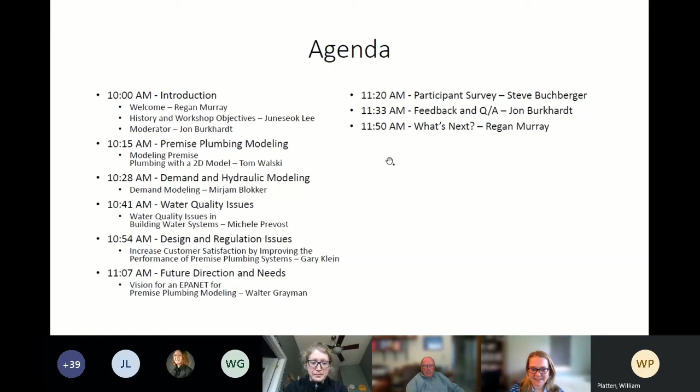Thank you, Regan. So let me first go over the EWRI, Environmental and Water Resources Institute. I believe most of you are very comfortable already and know the EWRI. Very briefly, it's ASCE's technical arm for environmental and water-related issues, and currently there are about 25,000 members within EWRI.

And PPM, Premise Plumbing Modeling, which was established last year in November, is a task committee of the WDSA, or Water Distribution System Analysis Committee, and it has a lead in EWRI in advancing the area of premise plumbing modeling. So the purpose of today's webinar, which was originally supposed to happen as a face-to-face workshop, is to advance the science of this new field of PPM, premise plumbing modeling, and help develop a building water systems management tool for use by practicing engineers, as well as the larger WDSA or water distribution systems research community, to support the safe design and operation of water distribution systems.

So having said that, I will turn over to Jon, our moderator today.

So, a couple of topics we're talking about: the fact that we are working with 2D models in general in a 3D world. We can track both water quality and hydraulics in the building. The solvers don't care if you're in a building or underground or exposed piping. The big problems are going to be bringing in good elevation data automatically. With system modeling, you usually have a digital elevation model that you can use to build your models quickly. You don't really have that sort of thing in a building, although you do in other ways.

One of the other things we'll talk about is the fact that water use in buildings now gets down to pulses. It's no longer these nice smooth demand patterns. And then we'll talk about how to look at the results.

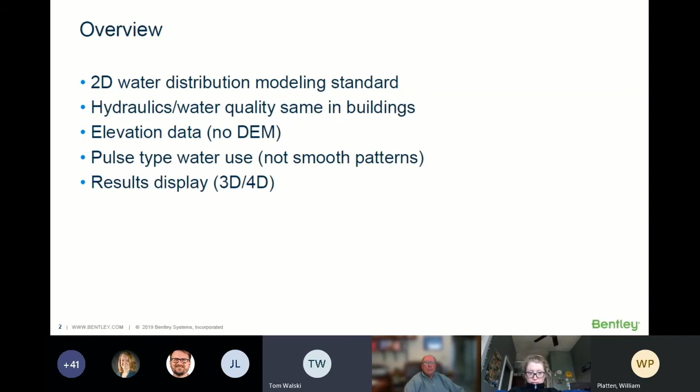Here's my trivial model of a system. This is what we have to do when you're trying to model a building with the standard kind of 2D models: break the floors up into individual models.

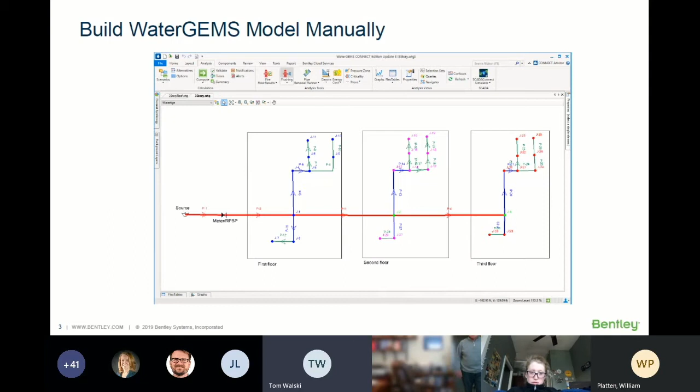So here is the building that I built. It's a 3-story building. We're going to treat the main in the street as a constant head source. This isn't always true, but usually most buildings don't have a significant impact on the distribution pressure, so treating this as a constant isn't too bad, or giving it some kind of pattern. Then we just laid out each floor with its own little plumbing, and we'll go over what those floors look like.

Here's what they look like. Each floor is going to have its bathroom with the sink, the ladies' room and the toilet, and the men's room. Over on the other side of the building is going to be a kitchen sink. So this is our trivial building. Each of the floors is going to be symmetrical, just to make my life easier.

You can run the model with those patterns. I used a random number generator to make my demand patterns up. I had nobody in the building at night, and then all these different uses of water during the day. You can color code by these elements and see which faucets are being run, which toilets are being flushed. Now I'm doing it by velocity of water in the pipes, and this looks really impressive. You just let this run as a time simulation, and you can see all these building water uses flashing on and off during the course of the day. It's a good way to illustrate what's going on and to track the water quality. So it actually looks pretty good - you can see, okay, there's a guy that just flushed a toilet and, gee, he didn't wash his hands, that sort of thing.

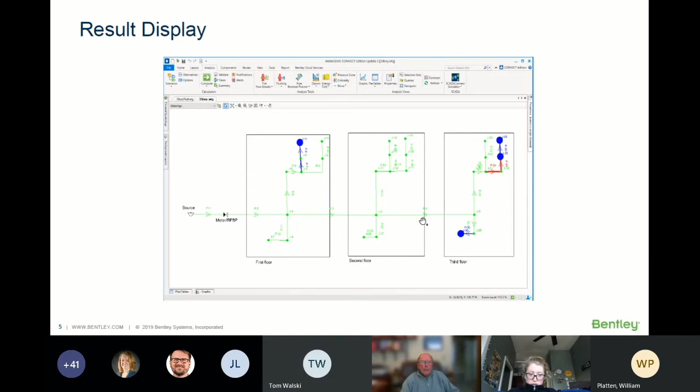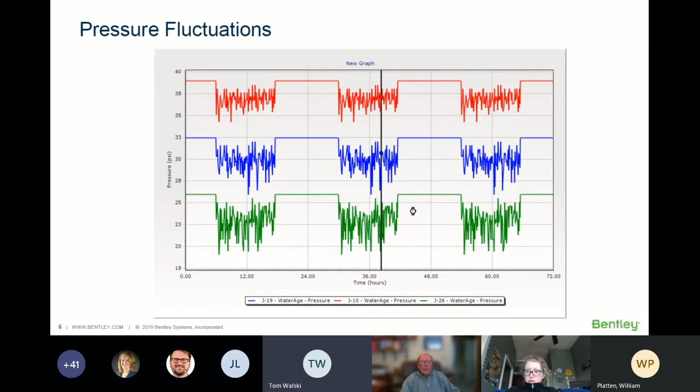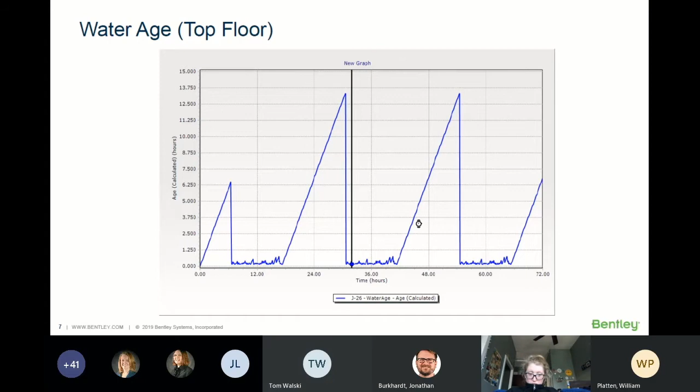Okay, and then we can actually look at the color code by velocity and see which pipes at any time have velocities there. So we do velocities and demands, and this is useful for seeing where the water goes. So this is the age in this particular case. You can see, at a certain hour today, some of these lines haven't been operated yet, so they're getting old water, while the ones that have been operated, it doesn't take very long for them to get flushed out with clean water.

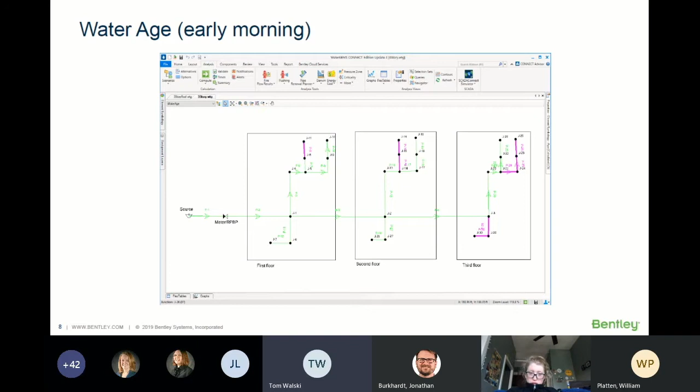Okay, then the next part of this is rooftop tanks. The place where things really change now are in buildings that have rooftop tanks. We're doing some work over in China where a lot of the tall buildings have rooftop tanks, and they really change the dynamics, and they change the water age pattern pretty significantly. They keep the pressure a lot more stable, but they affect the water quality because the water age in these tanks can be pretty high. This is some work that we're doing over there that is showing that this is going to be a bigger problem than the ones that don't have tanks. So tanks, just like in water distribution systems, if you're having problems with old water, you look at the tanks because that's usually where most of the aging occurs.

Okay, so now things have really gotten slow here. Now we're looking at pressure with the tank, and the pressures look a lot different too. The pressures stay maintained a little longer, so when you turn on a faucet at the upper floor, the pressure doesn't drop quite as much because the tank is right near that upper floor. Bottom floor, the changes are pretty minor in that particular case.

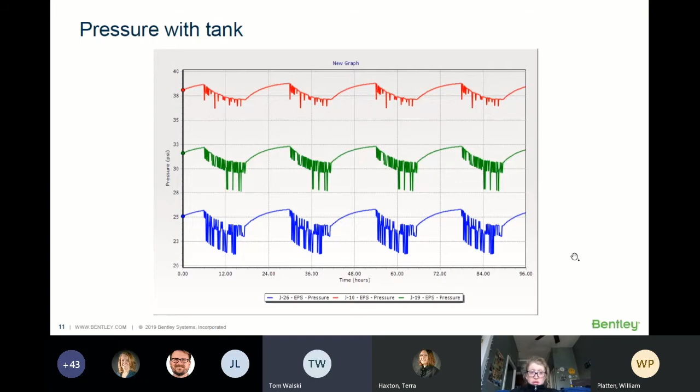Okay, then I looked at how to lay things out vertically, just to show that it can be done, two different ways where you put the riser pipe, but it doesn't look as pretty. I wasn't as impressed. I like laying the different floors next to one another, but if you want to lay them on top of one another to help display what's going on, this is what they look like. You can see this is laid out by diameter in this particular instance.

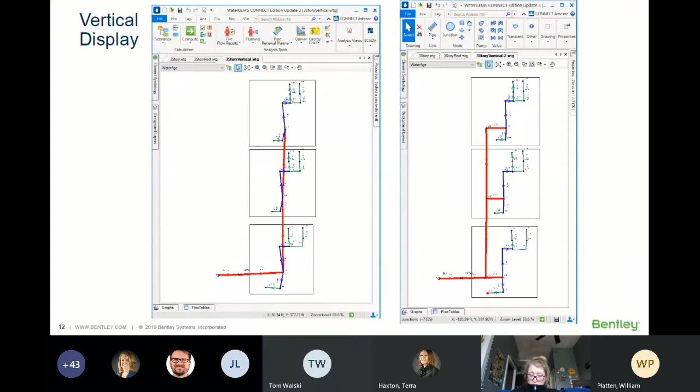So what happens is one of the big needs here is how do you build these models. Before you could do it with a GIS, but we don't have GIS in the building, so you need to go to BIM type software. This is where we have amazing software where we can take the building, do the X-ray of the building, and have the material showing where all the pipes are. You have a BIM model, building information modeling, and we could use it. That particular picture is actually an HVAC system, not the water system, but you get the idea that the data is there. Just as we import data from GIS to build water distribution system models, you can import data from building products pretty easily.

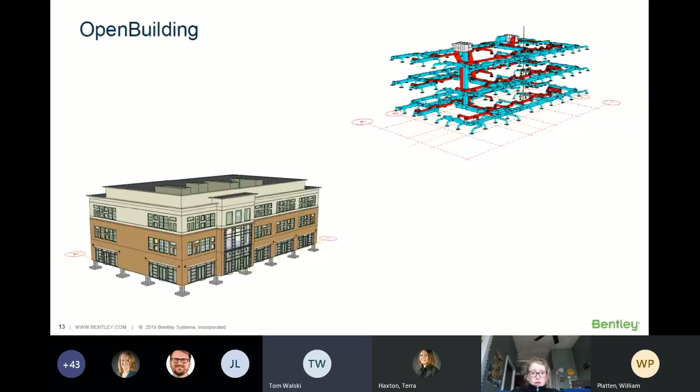This just shows some more. We have other tools used for plant design, for oil refineries and nuclear power plants and all. These kinds of models are great because you can extract the data quickly rather than manually building these models by digitizing them in 3D. I mean, it's really hard.

Looking towards the future, this is kind of stuff we already have. We can actually do hydraulics in 3 dimensions and show flows, but unfortunately it's only based on some really simple steady state hydraulics. So what we would need to do is link this kind of 3D technology for model building and results visualization with WaterGEMS or an EPANET-based solver in order to come up with really great visualizations.

I think the 2D stuff that I was showing works okay, but if you can show things in 3D, it really looks good. It's something we're kind of uniquely positioned for because we have all these tools that work in 3 dimensions. We've done a lot of this, we actually call it 4D, where it's 3-dimensional viewing based on ContextCapture over time. We've done things with our flooding products where we could watch floods, move anywhere we want in the city, and stand there and watch the flood come in and out. So it's definitely doable, and it's a matter of when the demand from people who want to buy software and have money comes in, we'll have this stuff implemented pretty quickly.

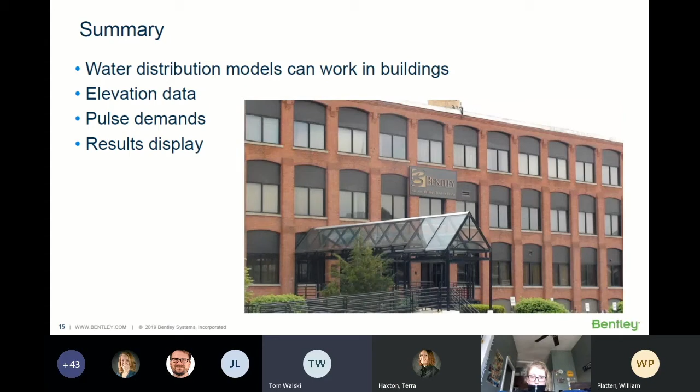Thank you. The issues that Tom brought up were related to demand estimation, and that segues into the next section on demand and hydraulic modeling.

Demand estimation and hydraulic modeling issues are important for premise plumbing systems. Water quantity delivery issues in a home or building can arise from poor distribution system pressure, as Tom noted, and also from poor premise plumbing design or changes over time that didn't take into account the whole history of the building. Water quantity has been a major concern in building design, with a focus on ensuring each demand receives the minimum flow when requested. While many uses of water are more volume-based - where you just wait for a glass of water to fill, and it may take a little longer - you may also have a more time-based use, where a shower with lower pressure may not really be desired, but within reason it's tolerated.

So you just take a shower for some length of time, and modeling the actual demands related to that is a challenging topic. Accurate modeling of usage patterns is critical, and models must ensure flow rates are accurately modeled if the pressure conditions are not sufficient for the requested demand. Models may also need to predict and keep track of who or what is using the water. Mirjam Blokker from KWR Water will now present some areas on this topic.

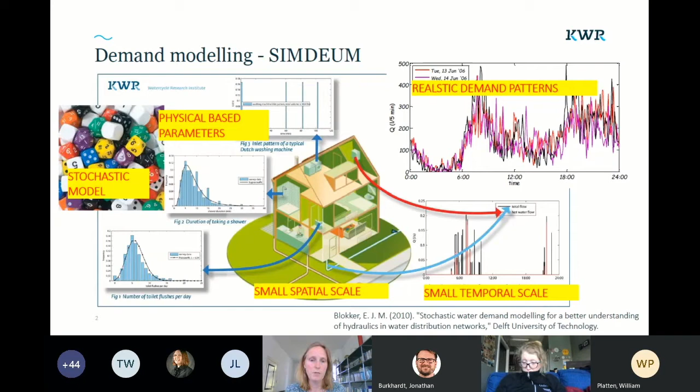And since we've really done this by end use, we not only know what the total water demand is, but also, for example, the difference between cold water and hot water demand. So this was built in from the start. Next slide, please.

This slide is for you to read later. To the next one.

I'm trying to give you a couple of examples of projects where we've used this model in premise plumbing modeling. Here is a very basic EPANET model of a home installation where you can see the water meter, then up to the water heater, and from the water heater to all the hot water taps, and from the water meter directly to the cold water taps. We've taken all the different end use patterns and applied them to the specific tap. Then you can look at hydraulics, as Tom showed, and water age, and other water quality. We've looked at temperature specifically, but also at some microbial parameters.

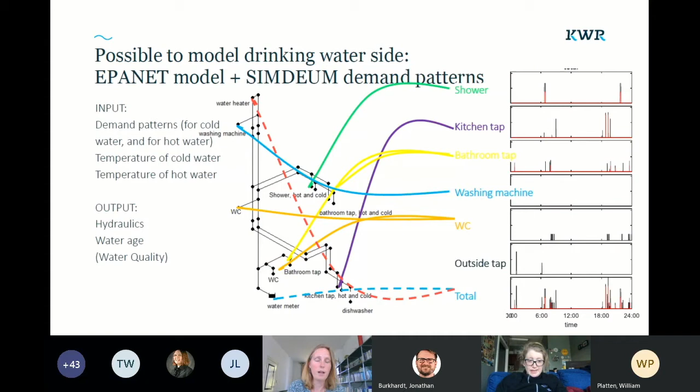Next, please. I would also like to apply these to premise plumbing of the in-home sewer, and I think the DRAINET model from Heriot-Watt University would be very useful. I am in contact, but haven't gotten the model yet from David Campbell, though he's willing to cooperate. So hopefully by next time I can show you some results.

It's very similar, of course, to the demand side, but this time on the discharge side, we can also add temperature and different nutrient loads depending on the end use. So nutrient load from shower water is different than toilet water, for example. Hopefully we can show you some results next time. Next, please.

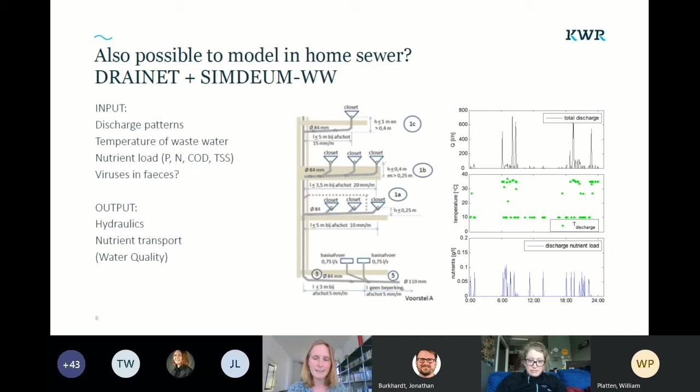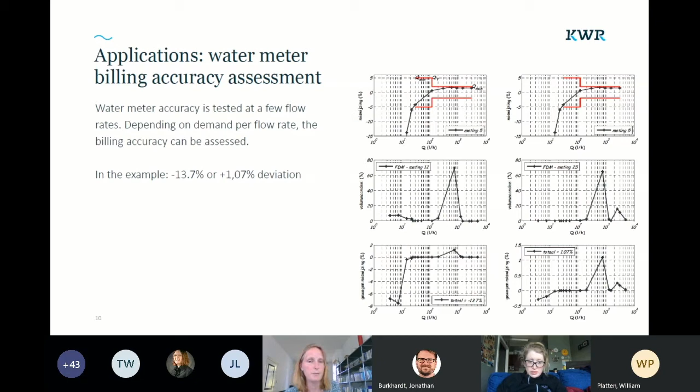By also looking at how these flows are divided over different flow rates, you can also assess billing accuracy, as typically at lower flow rates the water meter is less accurate. But if there's not a lot of use in that area, the effect on billing accuracy is not that large. It could be different depending on the demand patterns specific to the building you're looking at. Next, please.

One thing we did at TU Delft, Ljiljana Zlatanovic built a really nice model in an elevator shaft, mimicking a domestic drinking water installation. She measured for 1 year, and she did not invite people to live in this elevator shaft, but we put SimDeum demand patterns on each of the taps. There was a different demand pattern for each day of that year. We also introduced weekend days and weekdays.

She measured temperatures, and also some microbial parameters, trying to relate that to water age and things like that. The temperature model was found to be really close to what we actually measured, so that was a good validation. Next.

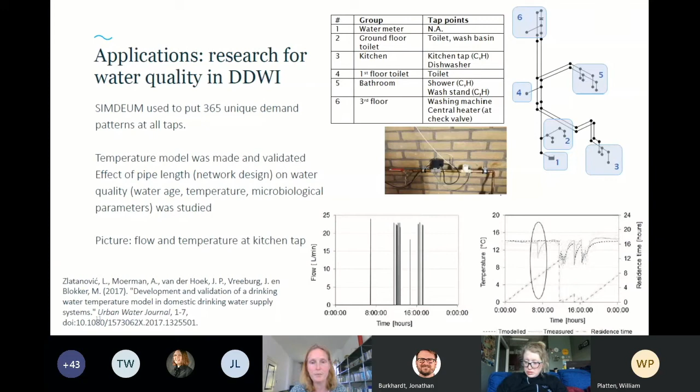Another application is to look at demands under stressed conditions. For example, what if there's not sufficient pressure, or electricity is not available, or people have to be in home isolation? We haven't looked at that yet. Especially pressure-dependent demand is really related to the 3D layout of your system, since your water heater is typically at the top floor, and if the pressure isn't enough to supply water there, people will not take showers unless they really like cold showers. There's no direct interaction now, but we have looked at what if pressure is sufficient to reach the first or second floor, but not the top floor.

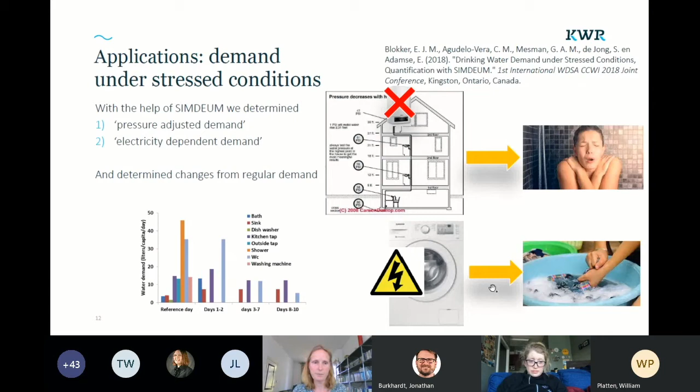Another application we looked at is the production of light gray water from showers, and the need for light gray water to flush toilets and use in your washing machine. Depending on the people living in the house and their behavior, you can determine what storage you need, not just for a single house but also at an apartment level. We found that a storage capacity of 200 liters per household could be sufficient to get a good reduction in drinking water demand, and rainwater did not add that much to it. It's really nice to look at what is produced and demanded at the same scale, instead of per-day estimations.

We've also looked at energy use for hot water. Taking into account the whole 3D layout of the system and pipe lengths, you can see how much energy is lost during waiting times and due to badly insulated pipes. This will also inform you about CO2 emissions or how much money is required for hot water demand, depending on the type of water heater installed.

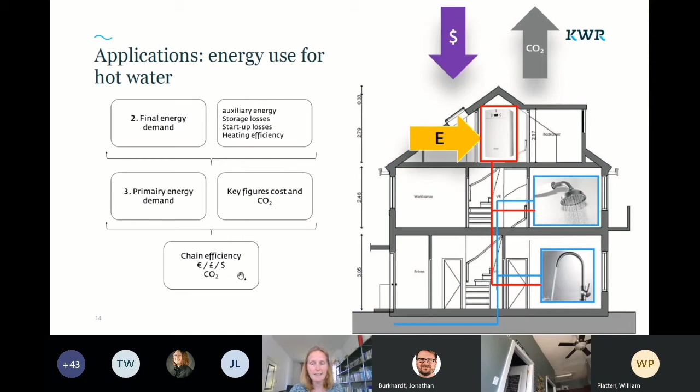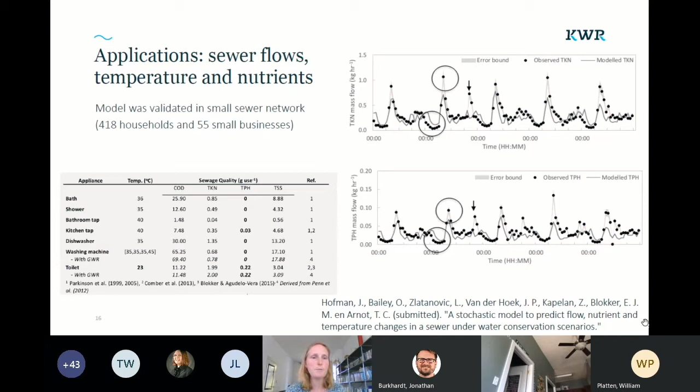For future work, I think it would be nice to couple such a demand model with EPANet to make much more use of its stochastic nature. What I've done so far is look at 300 or so deterministic EPANet outputs, then use MATLAB to try to make sense of variations in water age and things like that. It would be nice to directly be able to see that. Also, I think a coupling with EPANet could really enable pressure-adjusted demands, instead of doing this by hand.

As Jonathan also said, if it's just a toilet flush, it might take a little longer to fill that cistern, but the total demand will not change. That sort of thing should be possible if you have a direct coupling. I would also like to apply this in drainage models and home sewer models, and define some sort of standard drinking water installations for domestic and non-domestic use that we could all use for our publications as a good reference. Another thing we're doing is we built SimDeum in MATLAB, but we're translating it into Python, and we'll put it in the open source community on GitHub by the end of the year, open for everyone to use.

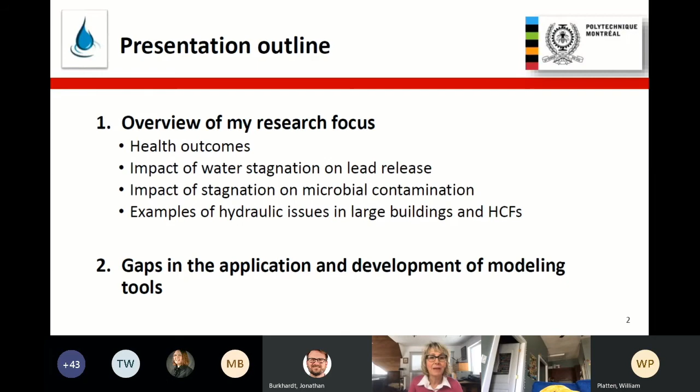So we know that distribution systems are a significant source of waterborne outbreaks. We kind of relate that to breaks, negative pressures, intrusion, ingress. But we know that there are health impacts of non-acute contamination events, and there is no reason not to think that some of these issues are not present in these large buildings. There are numerous studies on intermittent flow that show such health effects. Backflow siphonage is certainly an issue in these buildings, and ingress, although the work has been done mostly in distribution systems, is also a concern in terms of causes of waterborne outbreaks or disease.

With the NASEM report last year, which most of you are aware of, we all saw the figure which shows the etiology of drinking water associated outbreaks in the US for the last 40 years or so. The striking part is that it goes down over the years, but there's this black Legionella contribution that grows from 2001 to 2015 on this graph as the main contributor of drinking water associated outbreaks. And NASEM came out with a very scary estimate of the non-outbreak related numbers, which are most probably community acquired in hot water systems and cooling towers. It begs for a better control of our systems. Most importantly, these infections related to biofilm organisms, way more so than fecal contamination, which was our prior focus in many of our studies for modeling, are now driven by things like NTMs or Legionnaire's disease.

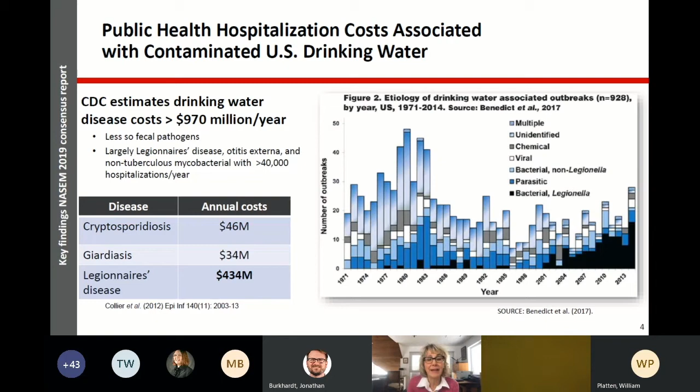I'm not going to have a slide on the health impacts of lead. I just put a couple of figures here to help you think about what we can do with better prediction of the impact of water age.

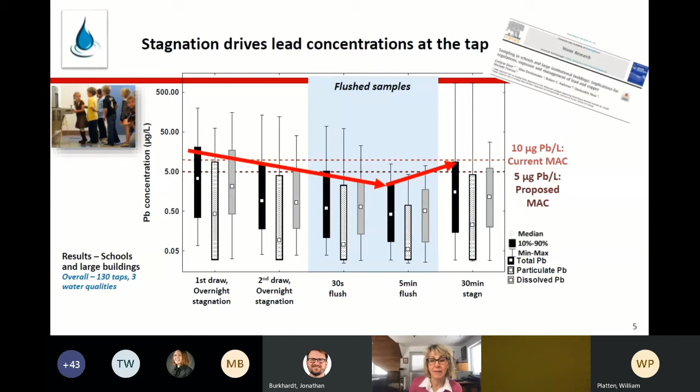You can see results from a school study published recently showing lead concentration going down with flushing, from first draw, second draw, 30-second, and 5-minute flushing, going right back up after 30 minutes. This begs the question of what we can do in these large systems to minimize stagnation by improving the hydraulics, acknowledging that at the distal point it's very difficult to reduce water age. It's different in residences with lead service pipes, and looking at the impact of water conservation devices on increased stagnation in lead service lines leading to higher exposure is a main concern of mine.

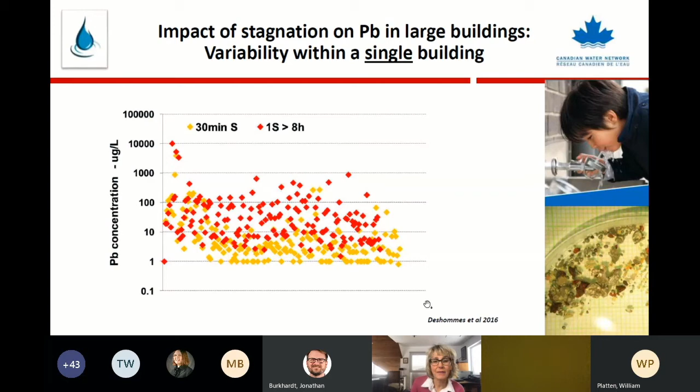I've been working a lot more on pathogens in the last 7-8 years in large buildings, identifying niches of pathogens in hot and cold water that drive infection risk. Most of this work was done in hospitals with cases, looking at the role of aerators as a vector of infection, the impact of material on the resistance of Legionella in biofilms to disinfectants such as chlorine, optimized thermal control regimes—basically balancing your system and putting it in control—and unintended consequences of water and energy conservation, including redesigning the sink environment to prevent neonatal infections.

Again, it's about quality at the tap, but also in the sink environment, drain, and surfaces as well. Most recently, the last three weeks of my life have been spent on COVID recommissioning—writing guidance and participating in various initiatives. When you come to commissioning, a bit like the Virginia story, there's very little science on how we can best deploy flushing in a very large number of diverse buildings. Finally, the impact of materials and pathogens in hot systems—I'm always trying to bring this back to QMRA to see which health risks are more significant and where we should focus.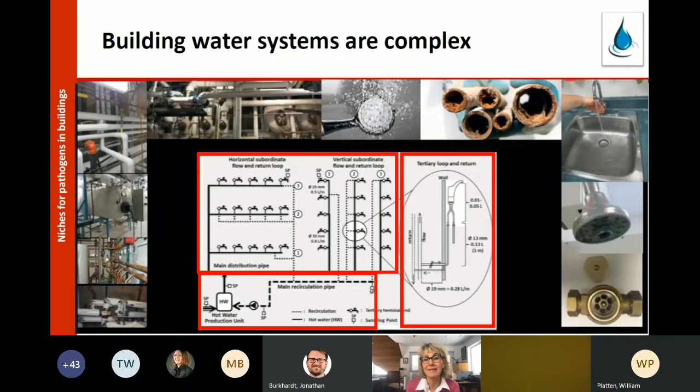A couple of slides to give you some thoughts. There was a nice slide earlier from another presenter showing that buildings are complex. Here I'm showing a simplified diagram of a hot water system. The bottom red rectangle shows the main recirculating line system. Just above that would be horizontal or vertical risers and distributing pipes, and most importantly there's this distal part, the tertiary loop and return, and this last little part that gets no recirculation. Keep that in mind for the next slides.

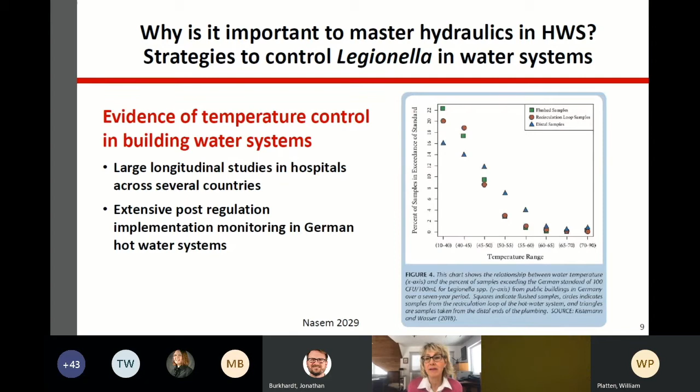This is from the NASEM report. We got our hands on tens of thousands of data points from a German colleague who just finished a study. I'm showing here the percentage of Legionella-positive samples exceeding the German standard as a function of temperature ranges. You can see that this percentage goes down, with a breakpoint around 55 degrees. The interesting part is that the three symbols are the flush samples—water that's not been stagnant—the recirculation in red circles, but the little triangles are really interesting. When you maintain temperature throughout a system right to the distal part, you really bring down these numbers. This is a call for why it's important to master hydraulics in hot water systems.

On the other hand, here is a temperature profiling study we did in a hospital where there was an outbreak on the 7th floor. You see these little numbers—temperature profiling coming in and in the return loop for hot water systems. At the end of these blue arrows you have 34 degrees C, 39.3 degrees C, and 36.8, depending on the time of day. This showed that for this hospital, a deficiency in maintaining proper recirculation and balancing the system basically caused an outbreak, stressing the importance of balancing the system with very simple tools.

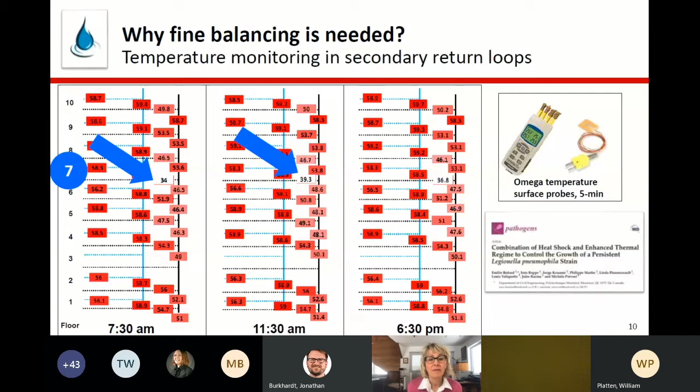So again here, temperature profiling. On the top, before any intervention to balance the system, and on the bottom, after these interventions. You can see the red line is 55 degrees. You turn on your tap and measure temperature as a function of volume. Before, it hardly ever reads 55 degrees C. After, it does more quickly. On the right hand side, you see what it did within weeks on the percentage of positive Legionella pneumophila samples, but more importantly, what it did in terms of concentrations, since infection risks are related to concentration, obviously.

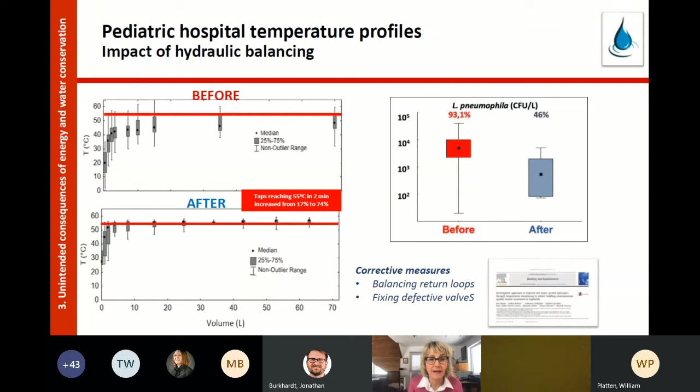Okay, last case study to give you an idea, a LEED school case study we were involved in two years ago. Very low demands for 200 kids, a peak demand flow that's very low. The school, when open, was subject to a boiling advisory that lasted for about a year. We had to implement continuous flushing at the tap to bring back the school under compliance because it was very high in total coliforms and HPCs. Obviously for these really good systems in terms of conservation, the ability to maintain chlorine residual is really difficult because of the way we design these systems with large volumes still and spread out points of use throughout the school.

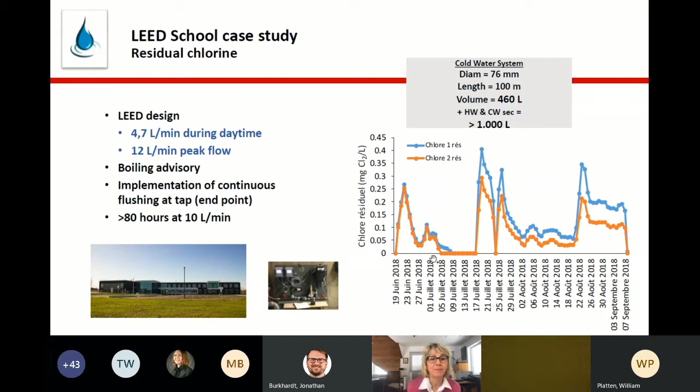So my last slide, I had a couple of ideas on what we could do with these models as they are being developed. I think they need to be used to adjust operation to minimize the release and growth of pathogens, targeting hot and cold water systems, and including the impact of materials and varying stagnation patterns, which is already in the way.

I think it's critical to understand if and how much residual can be maintained in large systems. The Netherlands doesn't use residual in distribution systems, but we do in North America, and we need to understand what can be done. Assess the risk of water and energy conservation measures, especially when we retrofit existing buildings.

Review the design of new buildings to avoid extended stagnation water quality losses resulting from the desired low water demand, and assist building operators in siting of automatic flushes.

And I would make the case that one of the really good things about the Dutch initiatives that Miriam was talking about is she has worked in several instances to try to relate this to the QMRA models. QMRA models are not perfect, but they give you a relative risk that can be very, very useful to decide where to act in large buildings to reduce health risks.

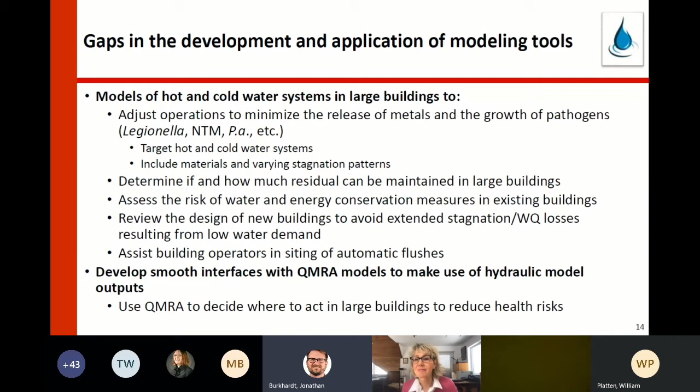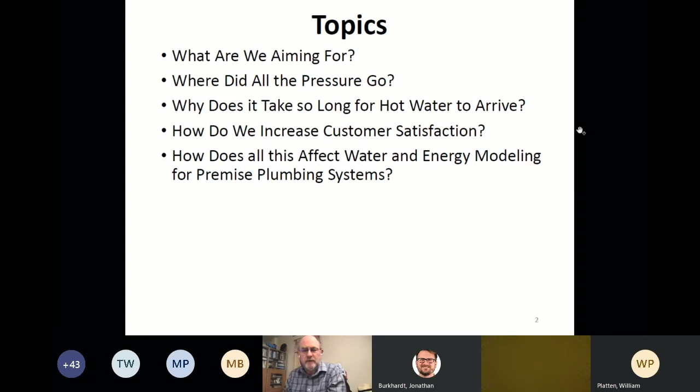Water consumption is not what the models currently say it is. Virtually all of the codes and standards in the United States are based upon consumption numbers that date back to 1950-ish. As you can see, since 1980, flows and flush volumes have reduced practically across the board.

What are we aiming for? People want the flow of flowing water. They want the water flowing from their showers and faucets to feel right. They want their toilets to flush first time every time. They want clean clothes, dishes, and bodies, and they want the service of hot water as efficiently as possible.

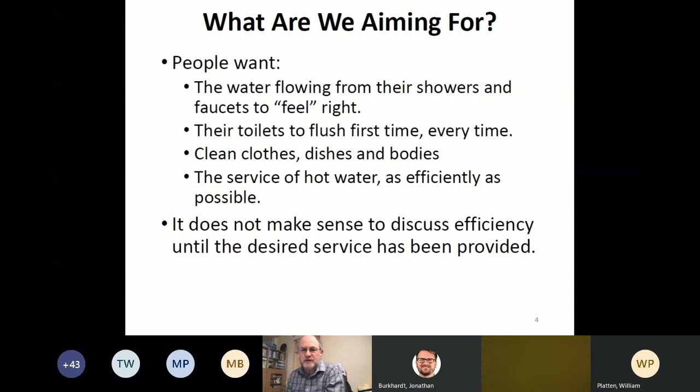It does not make sense to discuss efficiency until you've provided the desired service. So as a comment to some of the slides we've seen already, where green buildings don't perform well is they're not focused on the service, they're focused on the rules for green buildings, they're focused on the flow rates,

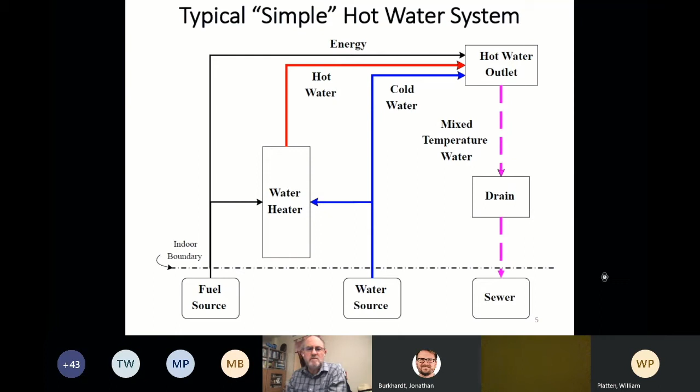not the service of hot water or cold water, and that needs to be fixed. Next slide. This is a typical simple hot water system. It could be in any building. Next slide. And this is a typical central boiler hot water system where you've got long distances between the source of hot water and the fixtures involved, and again, it's typical for apartments or other large buildings. Next one, please.

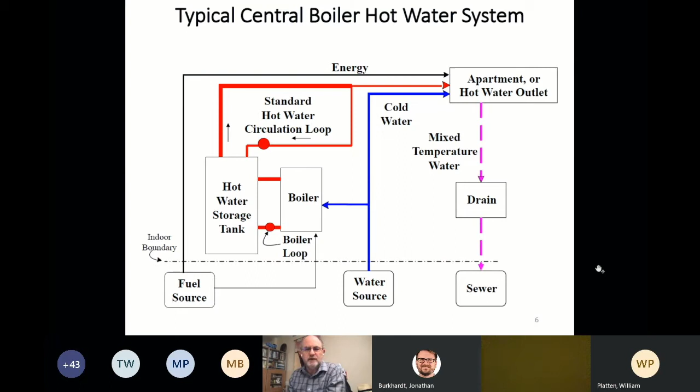Much of my work has been focused on hot water. And what I've learned over the last 25 or so years is that people want hot water now and they don't want to run out in their shower. And hot water now is dependent upon having a source of hot water close to each fixture or appliance, and it must be hot enough to use as hot water before you turn on the tap.

Continuous is not running out while you're in the shower, and it turns out the problem from our evaluation is not the first shower or the second shower, it's the third shower. The third long event tends to be the one that loses temperature, and people complain. There is one other thing that people would like to have that's not on here. They'd like a parental control switch for their children's showers. Next slide.

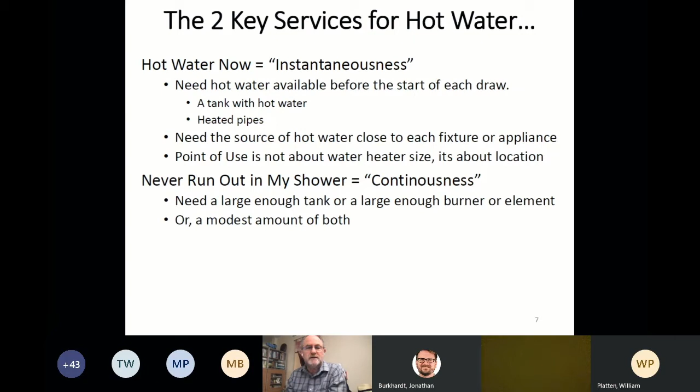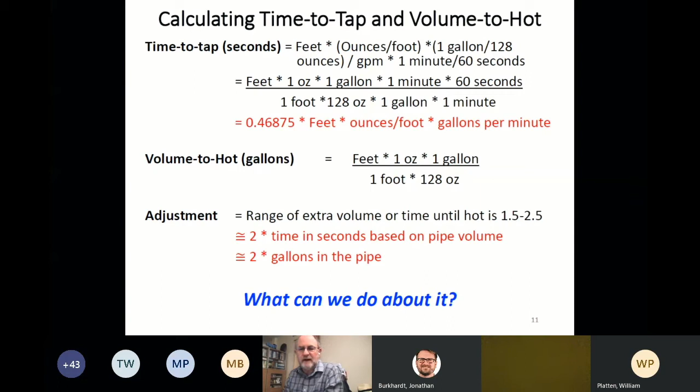So what we've learned in research that I did with Jim Lutz in the last couple of years is that a huge number of events in a daily routine don't actually ever reach the fixture in question because the volume of the event is smaller than the volume in the pipe. And we have to figure out how to get that effect into our modeling. Next one, please.

So how do we increase customer satisfaction, which is my key interest in all of this? You have to figure out how to reduce the time to tap. We have to reduce the pressure drop, and then we have to install pressure-independent faucet aerators and shower heads.

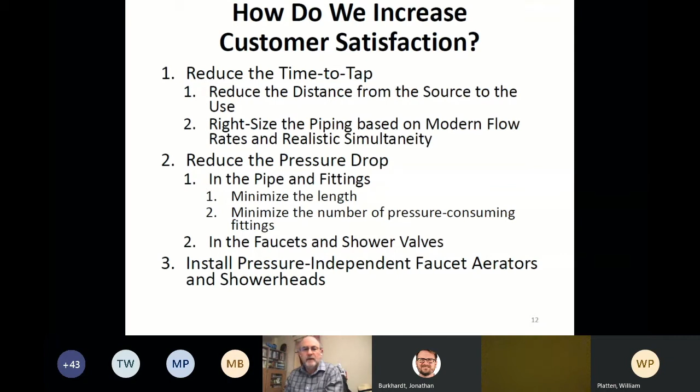I'm going to pick from a few of those topics because of limited time today. When we have a chance for a longer conversation, I'll be happy to go into detail. So let's reduce the pressure drop.

We've also measured the pressure drop through tub shower and shower valves. In all cases, since I couldn't get the data from the manufacturers, I just went to my lab and measured a whole bunch of them. It turns out that if you see 20 or 30 models from a given company in the store, there's probably only one shower valve or tub shower valve behind the wall. That makes the measurement relatively straightforward.

For the pressure drop in pipe and fittings, we now have 50 samples for 1/2 and 3/4 inch nominal pipe, copper, CPVC, and PEX. We've measured the pressure drop for those at 2, 4, 6, 8, and 10 feet per second. We have a range from 0 extra pressure drop through a bend to as much as 6.5 PSI through a bend, depending on the material and the nature of the fitting.

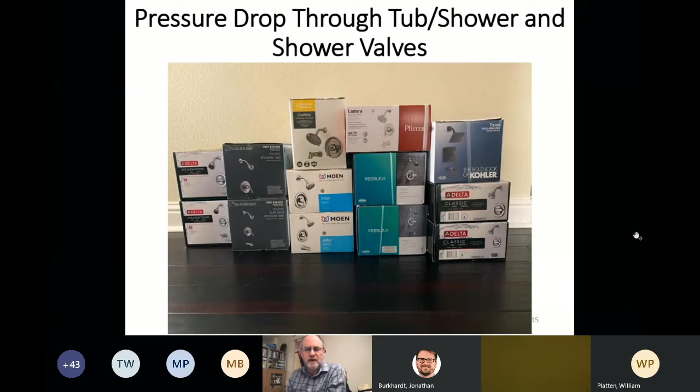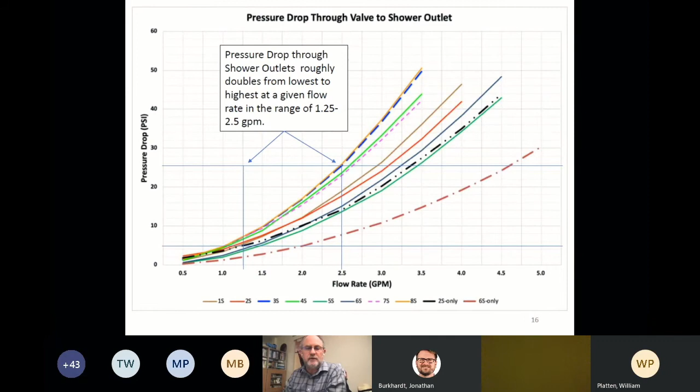It is my hope that someone in Europe will start sharing valves with us in the United States so that I can run tests on them just like this, or you can do it there, so we can see the differences. There's large restrictions - these are all the 1016 compliant valves for anti-scald in the US.

So I think we have to think about installing pressure-independent faucets and shower heads. My question to you is, which one do you want? Do you want the normal pressure curve aerator, or do you want the green or the orange lines?

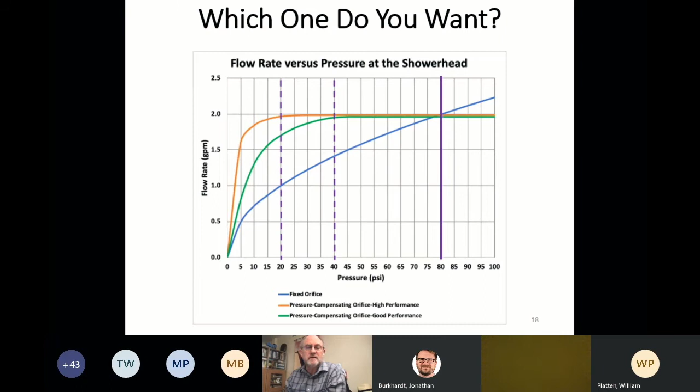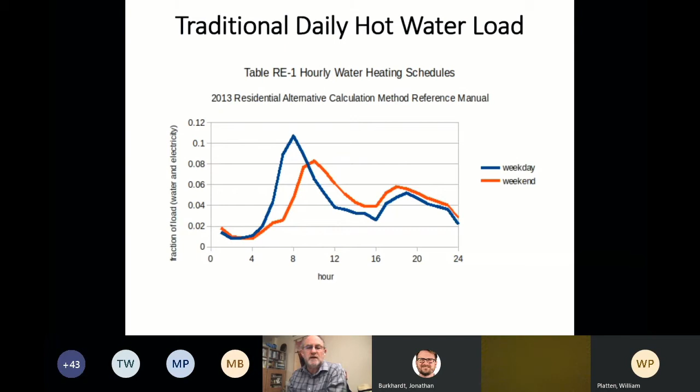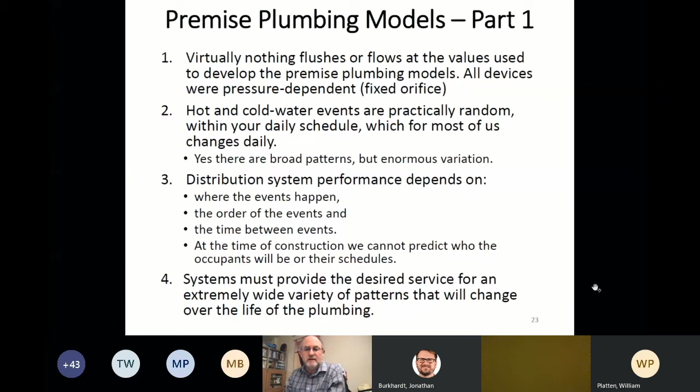In the models, as I said earlier, nothing flushes or flows at the rates that existed when the plumbing models and the plumbing mathematics for pipe sizing were developed. Hot and cold events are practically random. Yes, there are patterns, but there's huge variation. Distribution system performance depends on a variety of things. When we model things, we have to assume we cannot predict who the occupants will be or what their schedules are. So I think we need to design plumbing systems that work well independent of that.

Premise plumbing models do need to be revised. There are very few steady state uses of water - virtually all of it is intermittent. The calculations need to be based on modern pipe and fittings, but there are no good data for the modern fittings in the tables. I've got the best data set I'm aware of at the moment because I've actually measured it in a consistent manner. We need to account for the waste of water waiting for hot water to arrive for those events that require it. Short events don't actually seem to require hot water - they require water of some temperature. We should think about that.

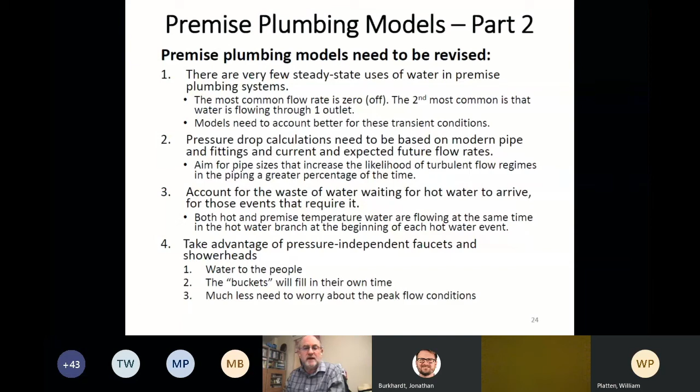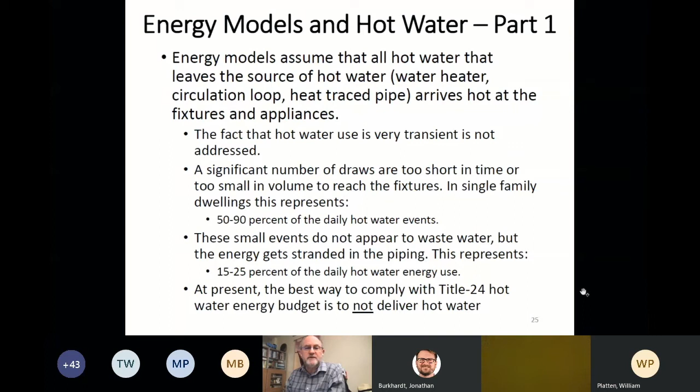Energy models currently assume that all hot water that leaves the source arrives at the fixtures. It's not true. You can read all about this later.

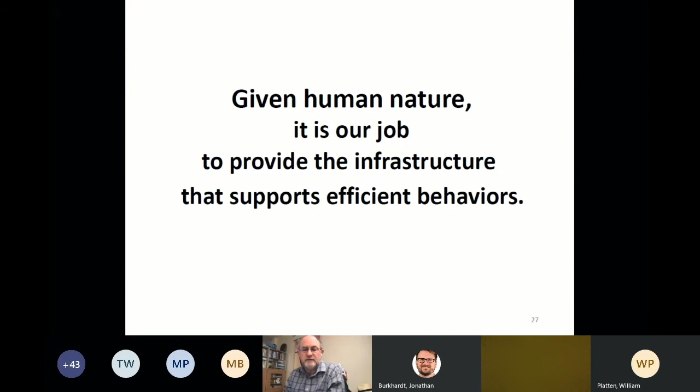Energy models need to be revised. We need to provide an equal level of hot water service at each fixture in order to properly compare the performance of alternatives. Currently, we penalize systems that try to deliver hot water efficiently, as opposed to those that don't deliver it in many cases at all. And given human nature, I think it's our job to provide the infrastructure that supports efficient behaviors. Thank you.

Thanks, Gary. So that was great - that showed a lot of the practical issues associated with building design, and we're definitely interested in the data sets you've collected. So the last session of the day before we do some wrap-up activities is related to the future direction and needs.

As all the speakers up till now highlighted, the complexity of premise plumbing modeling relies on plumbing layout, usage pattern, and then more specifically chemical and biological kinetic data, if we're going to get to that level, or temperature modeling. And it requires some kind of available modeling tool. Although capable tools like EPANET may not be enough to capture the complexity of premise plumbing systems, at least on their own. Full rendering 3D CFD modeling may be overkill, but a multi-species 2D model with dispersion may improve modeling of various water quality issues.

And when coupled with a probabilistic agent-based demand estimator, as previously discussed, we may have a valuable tool for modeling premise plumbing systems. And now our final speaker, Walter Grayman, will discuss how we as a community can move premise plumbing modeling forward and their associated tools into the future.

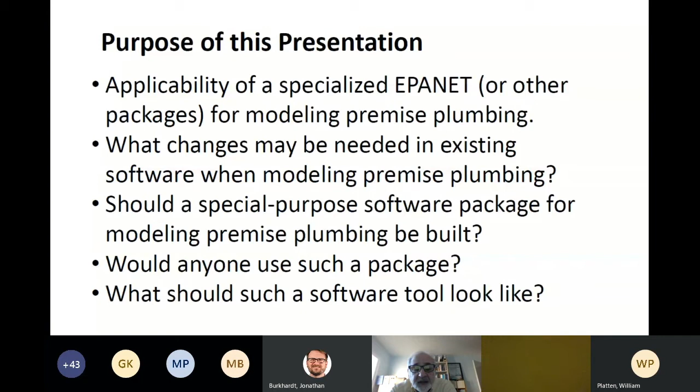This is called Vision for an EPANET Premise Plumbing Modeling. The purpose of the presentation is to cover the applicability, the need for a specialized EPANET, or as Tom indicated, other package for modeling premise plumbing. Looking at what changes may be needed in the existing software when modeling premise plumbing. Should a special purpose software package for modeling premise plumbing be built? Would anyone use such a package? And what should such a software tool look like? Next, please.

When we look at making changes, there's two general areas. There's first of all the engine, which involves modifications in the way that EPANET or other software simulates the hydraulic and water quality behavior. And there's the interface, which is modifications in the interface and the integration aspects of the software. We do need to address both of those.

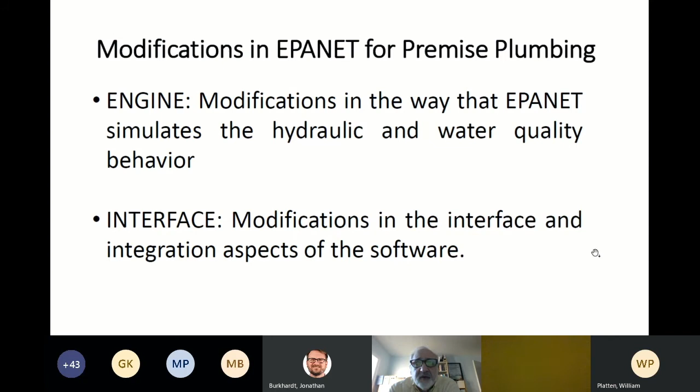Some of the areas in terms of engine modifications to support premise plumbing: demand representation, which Miriam talked about and others talked about; some of the hydraulics, dispersion, laminar flow, operation of premise plumbing fixtures; and as Michelle mentioned, water quality components.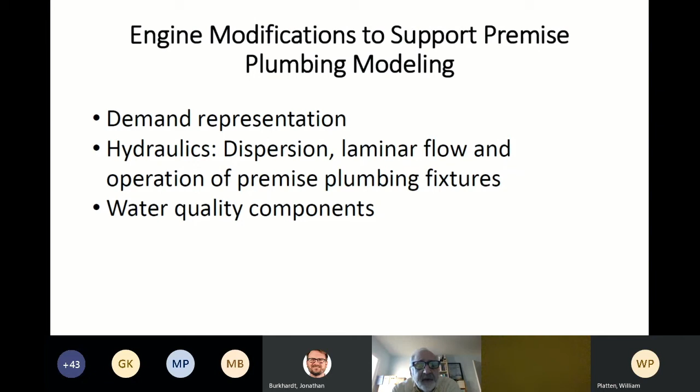In terms of demand representation, again, Miriam covered much of this. EPANet currently supports fixed patterns and to some degree pressure-dependent demands - the latest, more experimental version supports that. In premise plumbing modeling, additionally, it requires stochastic demands, very fine time scale patterns - it takes 20 seconds to brush your teeth - and hybrid models, which again has been mentioned, which are both volume and pressure dependent representation. So for example, a washing machine or a toilet that fills to a fixed volume, but the rate at which it fills is dependent on pressure. That's a different type of demand than what EPANet currently supports.

In terms of hydraulics, some of the areas include laminar flow, low velocity conditions, dispersion, non-advective transport through the piping system, and highly intermittent flows, as we've seen in several of the slides, where essentially there can be a 6 or 8 hour period where no flow is used in a system.

And operation of premise plumbing components. For example, I don't know, I'm sure Gary does, how a water heater works. Is it a completely mixed tank, or is it a FIFO or LIFO type system? And we need to know that if we're going to be able to model it.

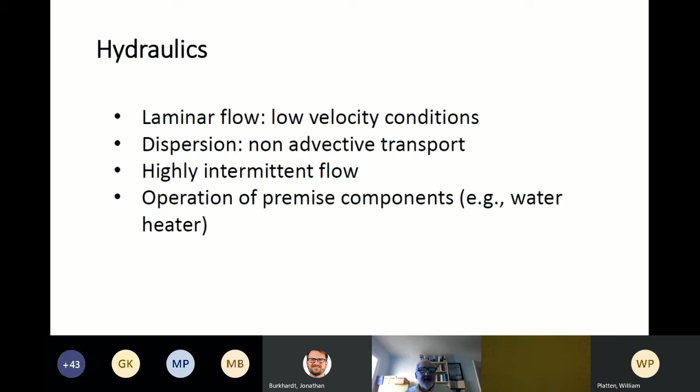And of course, water quality representation. We need expanded multi-species modeling of temperature, and temperature is not currently done in EPANet. It is done in some of the commercial packages. The ability to model Legionella, viruses, bacteria, lead and copper and corrosion, and other water quality parameters. And obviously there's additional research, really basic research and understanding needed before we can effectively model those.

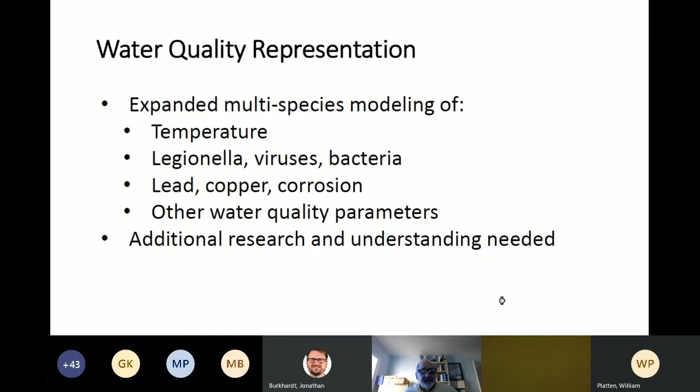On the other hand, there's the interface modifications, and I show the standard EPANet GUI. What needs to change, or what would we like to change? As Tom indicated, yeah, we can use the present software packages, but it may be nice if there were some changes to make it more friendly to modeling premise plumbing.

What components are needed in a premise plumbing model? How do we display it? 3D representation of premise plumbing. And again, as Tom mentioned, integration with CAD and BIM software.

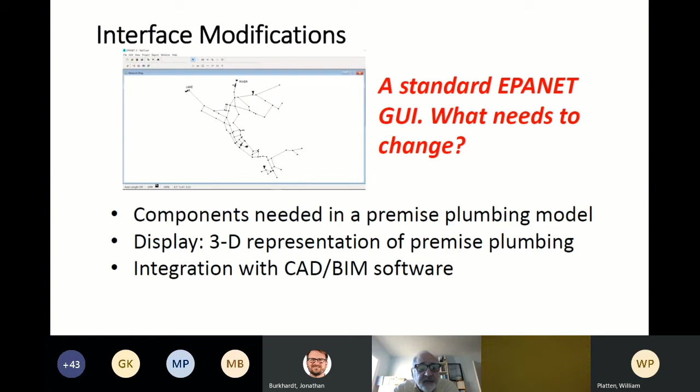So here at the top of the slide is the standard EPANet palette of components. And again, we can adapt things. We could use a tank to represent a water heater. But maybe it would be nice if we are going to be modeling premise plumbing that we have specific premise components - bathtubs, toilets, washing machines, etc., with each one having the characteristics specifically of that premise plumbing feature.

Display and integration - again, I'll reference back to what Tom talked about. We do need to reach out to the BIM, the Building Information Modeling, and the CAD communities to find out what is available, determine what is needed, and develop a plan to support premise plumbing modeling so that we can easily build a premise plumbing model rather than doing it by hand, and then be able to display the results in an effective way.

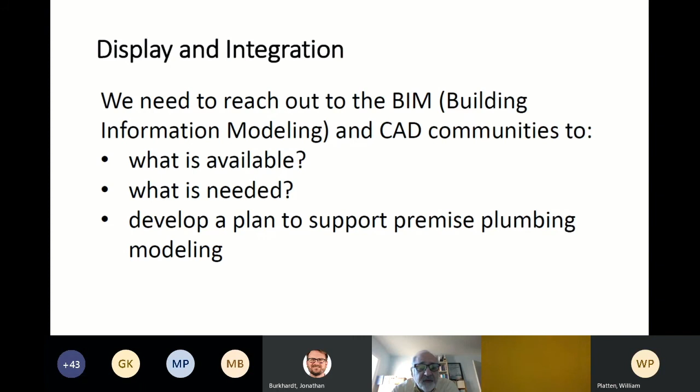We've heard about it, and over the course of the next several months the task committee is working to identify the potential applications for EPANet PPM, or again, a commercial package. Assist in the design of premise plumbing, improve the operation of premise plumbing - Gary talked very much about that. Investigate the vulnerability of premise plumbing to contamination, understand the water quality processes in premise plumbing. And there are many more that we're going to try and explore within the task committee.

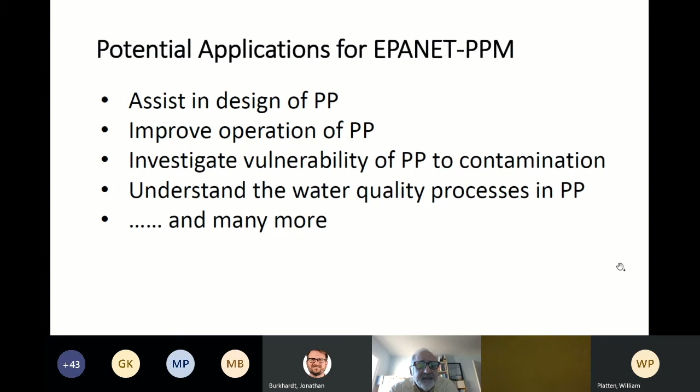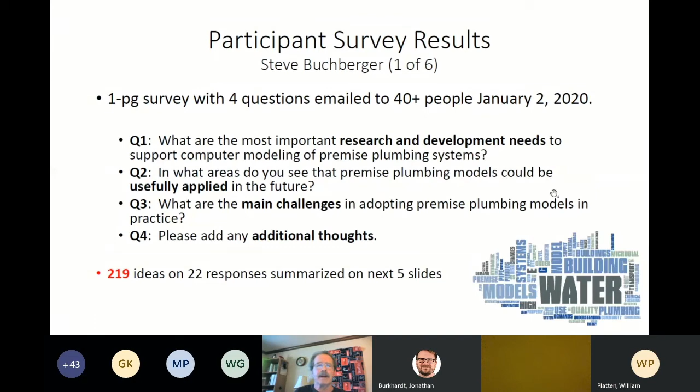One of the underlying themes was recognition that we've got a collection of individuals across the planet with a lot of experience working with water distribution systems. We have a good history, probably 20 or 25 years, where we've applied, developed, tested and validated some models. Yet we're moving into an uncharted area that presents new challenges. There are some pretty dramatic distinctions between a water distribution system we're more accustomed to dealing with and a premise plumbing system.

Flow regime—we've mentioned this briefly this morning. The presumption is that in the water distribution system we're dealing with plug flow, turbulent flow, whereas in a building we're talking more about laminar flows, stagnation, maybe transition through critical flow to turbulent flow. So we have a much more diverse mixture of flow regimes, and that has important implications for how we model water quality because it impacts the velocity profile in the pipes.

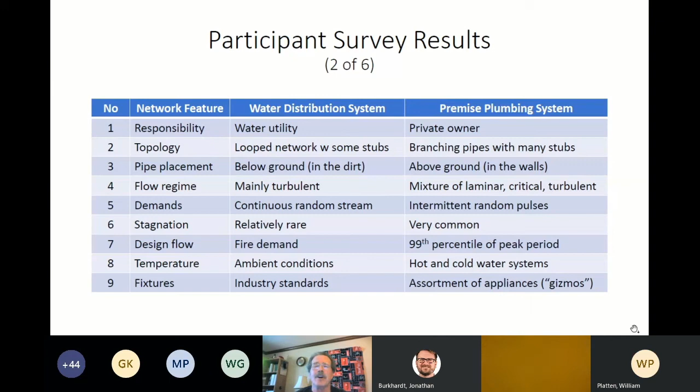I had to chuckle—one of the responses called them a galaxy of gizmos that are out there, all part of how we draw water out of the premise plumbing system. Okay, next slide.

The remaining slides, I'll briefly touch on the four questions now. The first one was research and development needs. Three major themes bubbled to the surface. One was that we have to get a better understanding of the water quality dynamics in premise plumbing systems. This is a complicated problem—we're talking about water chemistry issues, pipe material issues, microbiology, different flow regimes, intermittent stagnation, and so forth. It's something we have to focus on if we want to get a good understanding of predicting water quality changes inside a building.

That goes hand in hand with getting a better characterization of and being able to model water demands. We've made great progress here, tremendous work by the Dutch group and Miriam. So the third bullet item is to somehow combine these two—improving our understanding of water quality dynamics, driving it with a water demand model—to develop a user-friendly network type model, as Walter just mentioned, perhaps an extension of EPANET to premise plumbing systems. Those were really the three main themes that came out of the 80 needs identified from question number 1.

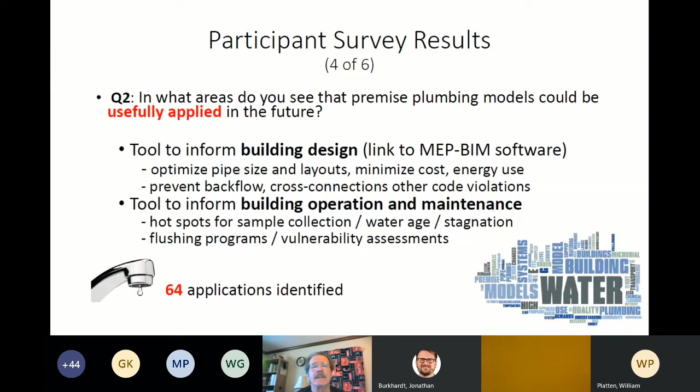Next slide. Question number three was main challenges, and here I thought there were 60 different challenges identified. So we recognize that there are lots of obstacles—of course, this makes it a worthy problem, doesn't it?

The one or two that were identified most often: is this something that would be accepted by the plumbing engineering community? Is this a product we could convince them has value, that they would endorse it and be willing to use and apply it?

Going hand in hand with that were concerns about cost—the cost to acquire the software, if someone has to purchase it. For example, EPANET is public domain, there is no cost, but we don't know what this next version might look like. What's the cost to actually use the model?

If a firm decides they want to apply it, how much time does it require to come up to speed and actually run the program? And then, based on recommendations that come from the program, what's the cost to implement those recommendations—are they reasonable? So lots of issues surrounding cost.

And then the third was just the overall difficulty in creating and sustaining a reliable, user-friendly product. In a sense, we're after the holy grail here for premise plumbing. We'd have to conceptualize what this would look like, combining water quality and water demands, code it up, calibrate it, validate it, and apply it.

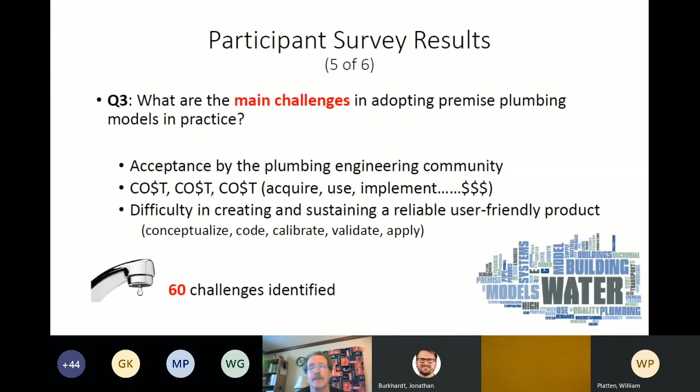And somewhere along the line, we have to find the funding to sustain and support an effort like this. So it's a worthwhile challenge, and we've got a lot of very knowledgeable folks interested in working on this problem. But it's really analogous to the TOE in the physics community—we're after the theory of everything, the TOE, here with this premise plumbing model.

All right, final slide—this was additional thoughts. It turned out about 15 folks wanted to add some additional thoughts, and I call those the WOE, W-O-E. What I mean by that is generally words of encouragement.

So very heartened to see everyone recognize this was a great opportunity for collaboration among agencies and across disciplines. Certainly this is going to lead to some journal papers and some joint research proposals, even opportunities to produce state of the science material we can use in the engineering curriculum. After all, there's really not a lot of work in the engineering curriculum right now in this area.

It's perhaps not viewed as quite sexy enough, and I think there's certainly a lot of need to revisit that and bring it back into the curriculum so that the next generation of engineers knows how to properly identify and solve these problems. And then even recognition that this is a wonderful opportunity to connect with the building energy simulation crowd. There's a whole other group running around out there that spends a lot of time in building energy simulation, and that has a lot of overlap in the Venn diagram with this problem here. We should be interacting with that group too.

So I don't know how I did time-wise. I think I might be a little bit ahead of schedule. Yeah, you're good on time, Steve.

All right, so I'll wind down then sooner rather than later. I think I've covered the six slides and touched on. I will mention I'm in the process of consolidating all 22 pages so that we'll get those bound up so you can see the full reporting from all the participants, and you can draw your own word clouds if you like and your own conclusions.

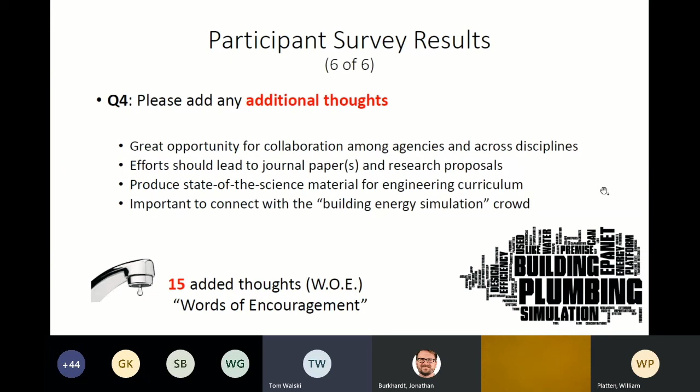So it's not just the U.S. where this is happening. And the thing is, they actually have some regulations coming down the pipe about this, and they're trying to pass the responsibility for running these systems off to the water supplier and not to the building owner. So the regulatory environment there is more demanding of this kind of stuff than the U.S. I'm waiting for the U.S. to try to come up with some regulatory requirements, because that's what it's going to take to drive any money into this. Otherwise, it's a bunch of us researchers talking to one another.

Okay, thanks Tom. And Morris raised a point - I don't know if this was specifically to any speaker, but I think this is a good point to ask as we're thinking about where to go next: can existing petrochemical plant piping models offer any tools that we could use in premise plumbing modeling? I don't know if any of the speakers want to speak to that, or we can just leave it as a discussion point for future meetings and a question that we ask ourselves.

So I don't know if any of the speakers had any thoughts on that, but.

Well, as I mentioned in my talk, we do a lot of this kind of stuff, but it's mostly just like a peak in other parts of the company, so I don't get involved with this. But we do a lot of this under the BIM and CAD parts of our company, and mostly, though, they've tied it in with just some simple steady-state peak flow stuff, like based on fixture units for pipe sizing, as the old Hunter methods.